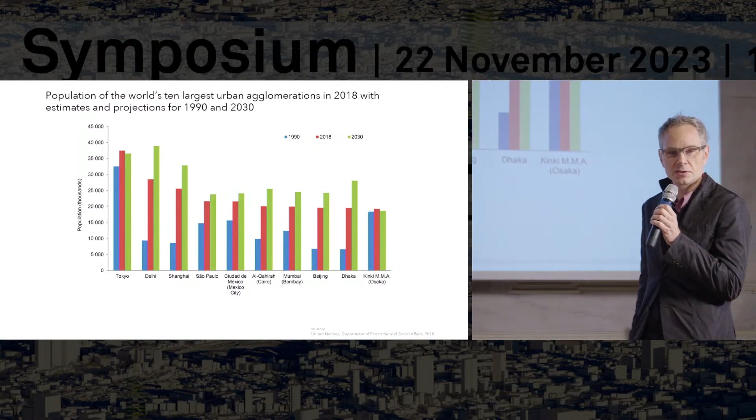As you can see, number 1 was Tokyo, and it may have been overtaken by Delhi, or will be very soon. The only two places with declining population are in Asia, in Japan actually - Tokyo and the wider Osaka region. All the others are rising sharply. In fact, around 2007, around the global financial crisis, there was an interesting point in human history: the urban population for the first time exceeded the rural population globally. And the trend is clear.

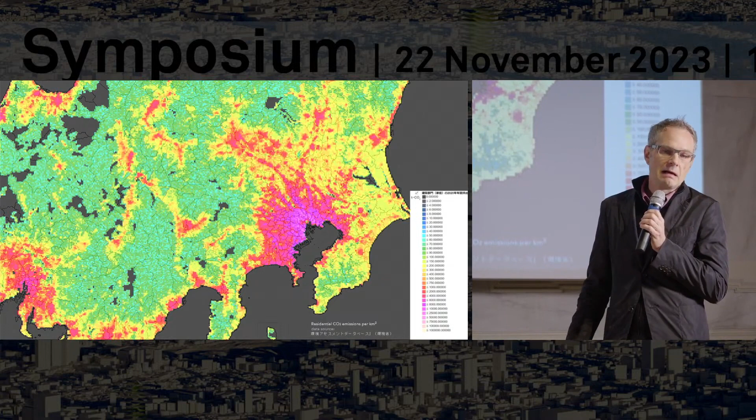By 2050, the United Nations projects about 70% will live in urban areas. So, urbanization. Urbanization is, in principle, a good thing because it is very important that we have density to limit our footprint as humanity. This shows Tokyo, the wider area of Tokyo, in terms of carbon emissions. Of course, urban areas have a tremendously larger amount of carbon emissions than rural areas. But the interesting thing is that this graph is actually wrong if you look at it in relative terms.

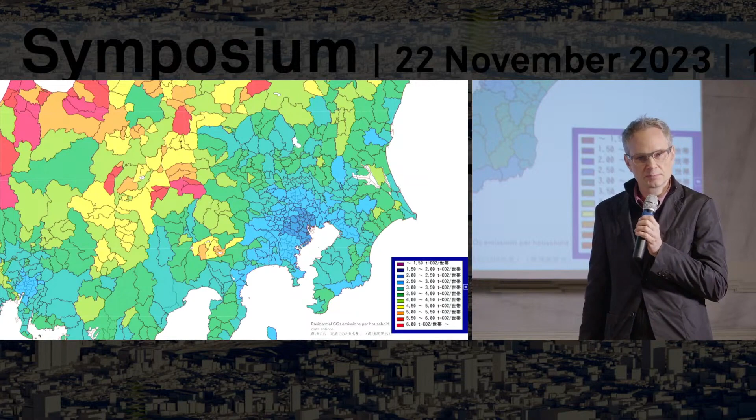This becomes even more clear if you think about this projection of global population. We are currently at around 8 billion. If you take the medium projection, around 2080 the global population will peak at around 10.5 billion people on Earth - that's 2.5 billion added from today over the next 57 years. Just to put this in perspective: to house 2.5 billion people over 57 years, we would need a city of 10 million people every 2.7 months. So that gives you an idea of the kind of issue we are facing.

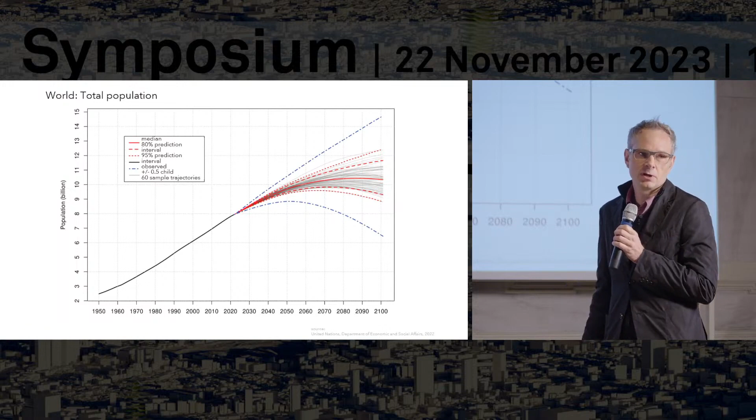If you compare that to what Isozaki said about 60 years ago, when he was 31 I think: 'Such city planning has always ended in empty theory, and that is why cities have been kept alive.' And that, unfortunately, is no longer true. Despite the city's inherent complexity, architects, planners, and developers have all had this vademecum for urban density biased towards solidified enclosures. Either the response is a commercial tower with a plinth, or it's a straightforward extrusion of a residential tower. This has been the knee-jerk reaction in order to increase density.

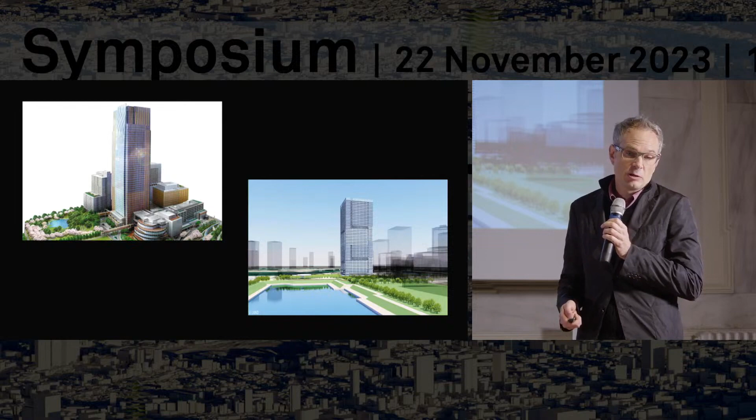And the problem is that we can see the limitations of enclosures here. It's a tragic disengagement with the city. And the more of these you build, the more you actually de-urbanize. More public space is turned into privately owned public spaces, which are of course the opposite of real public spaces. I've often talked about this, about the Starbucksification. If you go to these commercial areas - Sharon Zukin, a sociologist, called it the pacification by cappuccino. So we are all happy, part of this system where, as long as we have enough means to afford it, we enjoy these areas.

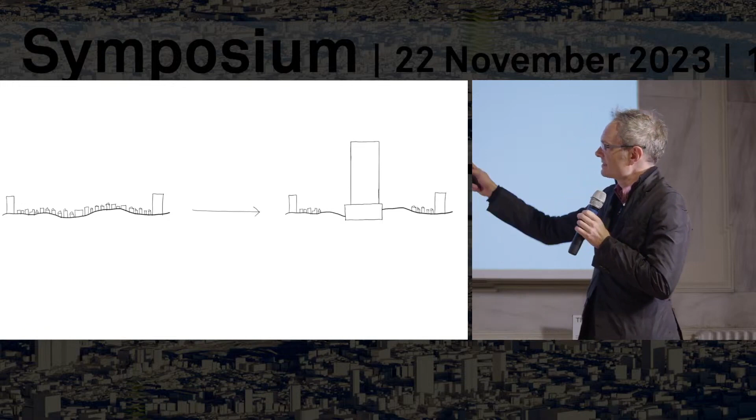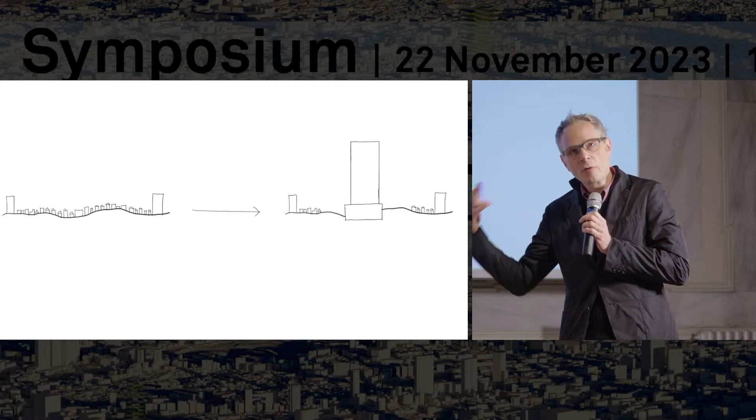So the conventional response has been the tower with or without plinth. This left image is a diagram of Tokyo. You see an ocean of small and big buildings, which is completely open, so this entire in-between is walkable. There's nothing wrong with the vertical per se, but if that's the only response we have, I think we are facing serious issues, and we'll talk about them in the coming presentations.

So the problem is the conditions at ground. The conventional high-rise buildings do not understand or care to understand the urban fabric. 20 years ago, Koolhaas, in a scathing criticism of what happened in Tokyo, said more and more of the world's ground floor is handed over to Jerde, whose universal blueprint seamlessly closes off all horizons, blocks all the exits, eliminates all perspective.

Now, criticism is nothing new. As we could see from Koolhaas, it was preceded by Arata Isozaki, who I've mentioned. Then there's, of course, in the 60s and 70s, Henri Lefebvre, Jane Jacobs, David Harvey, Sharon Zukin. They all are aware of the dangers that come with that kind of urbanism. But also not new is the recognition that repeating the conditions at ground level in the air provides density and openness at the same time - the importance of openness.

So in 1954, Le Corbusier's disciple Yoshizaka came back to Japan during the massive reconstruction after World War II, and he wrote in a very small article: 'It is not necessary to make all the fine details of the home with our current budget for public housing. What we need to do is to make land.' And he continued, 'Fortunately, the space in the sky above Tokyo is still relatively unoccupied.' So that's his sketch from the time. It's rather modest and quite cute, actually.

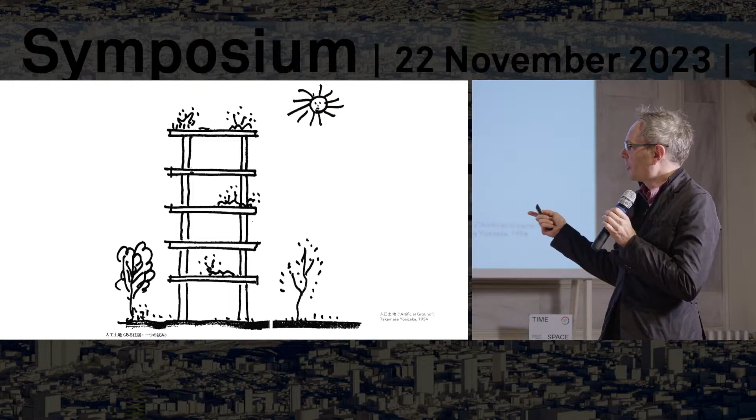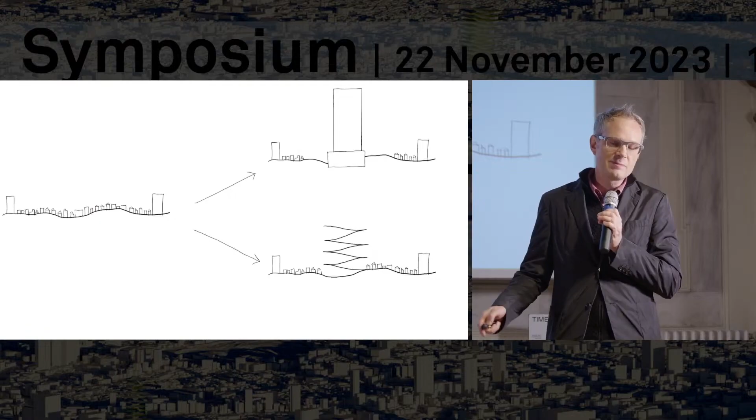Vertical landscapes introduce a new urban typology. From the only response being solidified mass, to the continuation of the city's land, streets, squares, parks, in the air. Open to anyone at any time, these man-made landscapes are the natural extension of the urban ground conditions at ground level.

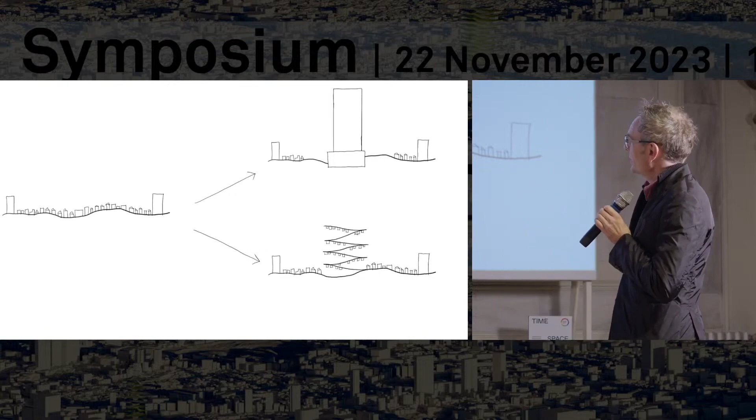So you can see we would think that we continue these small elements upward. And by the time we are in the air, we realize that we can actually start hanging from the land, suspending. Now suspension has a tremendous advantage - it's the minimal material effort that you need versus compression. And you can see that we have another way to deal with density, increasing density in the urban context.

Vertical landscapes are not a building, they are infrastructure - infrastructure multiplying the city's ground without architecture's compulsive desire to determine. You can see that in principle we have a surface, a place for people to have housing, or it could be shops, it could be what you see normally on street level in the city. And the overall structural system is something like this. This is just a prototype.

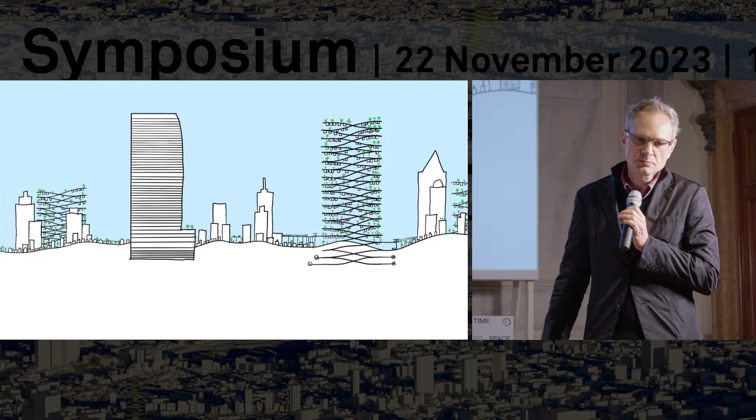Vertical landscapes are not about height per se. We don't have to go as high - we could go higher, we could go lower. It's about the principle. So instead of density as striated enclosure, we can add vertical landscapes that lead another way - density in openness. More ground means more of the bottom-up evolution which lets a city thrive.

And finally, not a master plan. Vertical landscapes are not a blanket solution trying to undo the city, as we've seen in the past and we'll be seeing in the next presentations. They are local interventions which seek opportunity and respond flexibly. They are one of several possible solutions to a problem too complex for a one-size-fits-all approach.

So this, in a nutshell - kind of a big nutshell, sorry - is what the vertical landscapes are about: density of openness. And that's possible and even logical precisely because of the heterogeneity of the city in general, and Tokyo gives a remarkable example of that, from which we derived these vertical landscapes. So let the next speakers show us why and how, and what that could mean on a global stage.

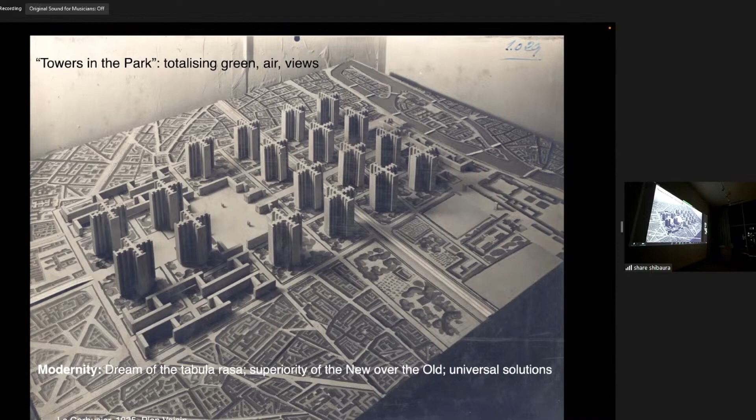In Japan as well, it took an effort to make the high-rise city a reality.

One of the proponents was Minoru Mori, the founder, or the second president, of Mori Building in Tokyo. 'The builder who pushes Tokyo into the clouds' was the headline by the New York Times, calling Minoru Mori the Tokyo Tower developer. Roppongi Hills was his poster child, opening in 2003.

Back then, he also unveiled an exhibition called The Global City, where we would see these kinds of high-rise models—Mori Building making a business model of building and replacing the old vernacular city with towers.

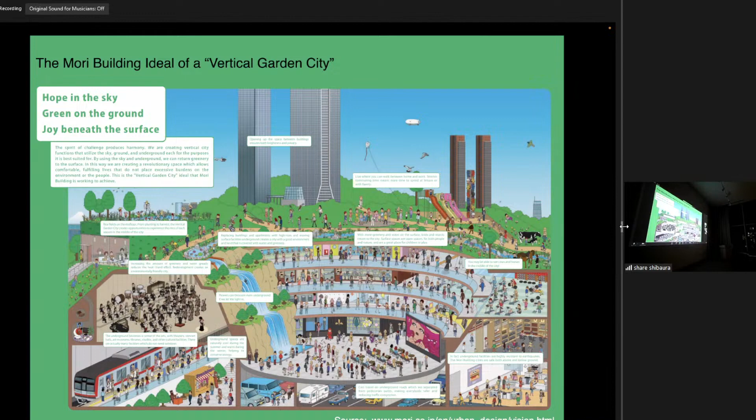This is another text part from Mori's vertical garden cities. It is about cementing Tokyo's positioning among the megacities of the Asian region and stimulating the economy. We don't hear a lot about urbanity, about authentic public life, about mixing of people of different social classes, of social integration, about community structures and so forth. All that seems to matter here is economic value.

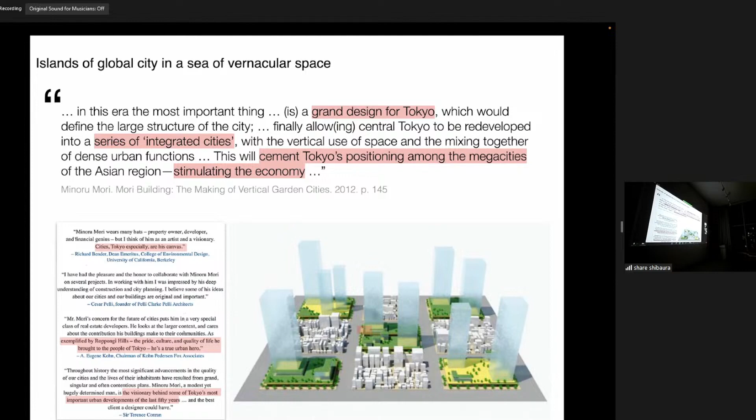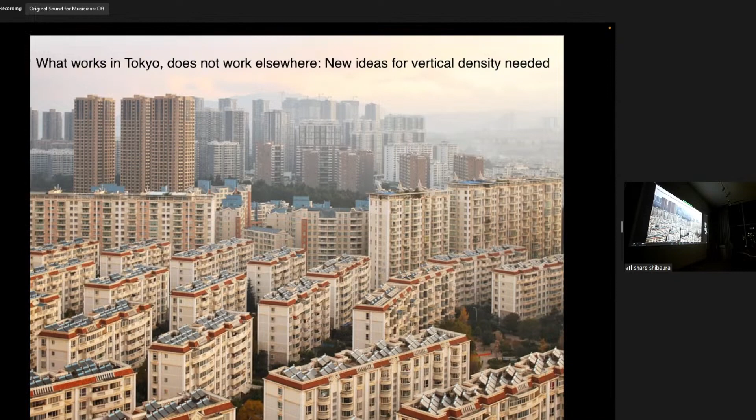If we go from Tokyo for a short excursion to China as well - yes, in Tokyo the high-rise is working comparatively well, we don't see the social problems associated with high-rise housing in other countries. If we go to China, and see now one typology copy and pasted dozens and hundreds of times, we see what kind of environment this is creating, where people hardly meet each other anymore, where we are segregated in compounds and enclaves, moving between these kind of compounds, all urban life grinding to a halt.

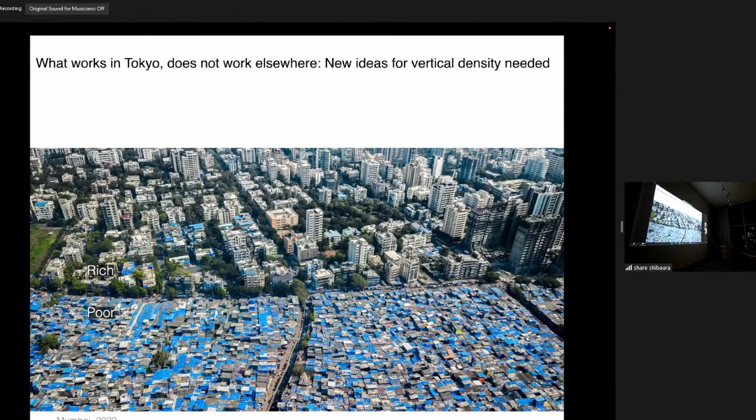If we go to other cities as well, this is Mumbai, we see this kind of very sharp segregation. Above is the city of the wealthy, the city of the rich. At the bottom, we see Dharavi, the world's largest slum, the city of the poor, sharply divided. So how can we overcome this kind of division? How can we create more vertical density by integrating communities, by creating continuity in the city, rather than creating this kind of compoundization and mallification that we're seeing playing out all around the world?

So is there a better way towards vertical density? How to create resilient, sustainable cities? This is really the question that I want to bring up for the following speakers as well. I want the audience to keep this in mind when they are listening to the designers of the vertical landscape.

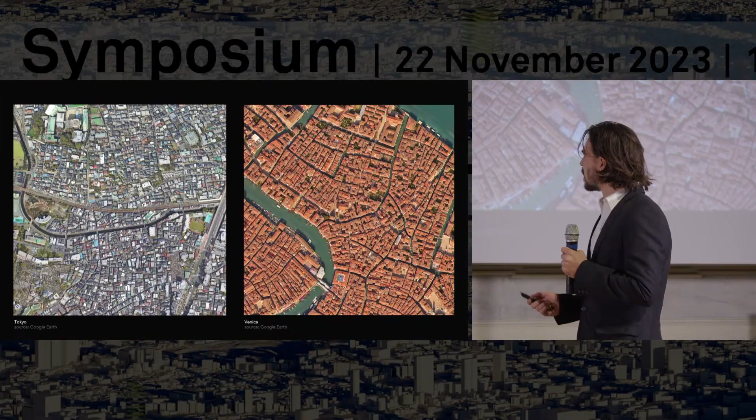One big difference, though, is that all the buildings in Tokyo are new. They're on average only 27 years old, while the buildings in Venice are maybe 500 years on average, I'm not sure. What's even more important is that the buildings in Venice may still be here 1,000 years from now, while the buildings in Tokyo will all be gone.

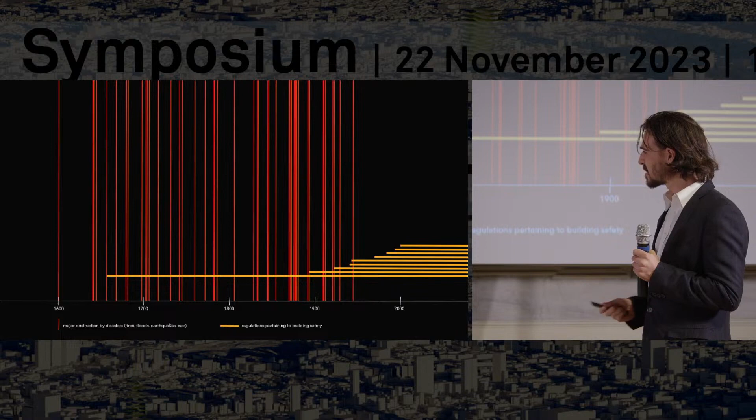This culture of urban regeneration in Tokyo didn't arise in a vacuum. This is part of being in a country where nature is stronger than man. On this graph, you can see how the city has been repeatedly destroyed during the course of history due to earthquakes, fires, floods, and also wars. So it's not just natural destruction, also man-made destruction, and sometimes both go together.

As is the case now with the new urban regulations, which on the one hand are stopping this pattern of destruction, but they also imply a form of destruction in themselves. Because if you don't constantly rebuild the city, it won't be able to live up to these regulations.

Even though that's true, the life that is happening in between has stayed almost the same. So we could say that resilience in the Japanese city is dependent on this ephemerality, and ephemerality is a form of resilience which keeps the city and its contents alive.

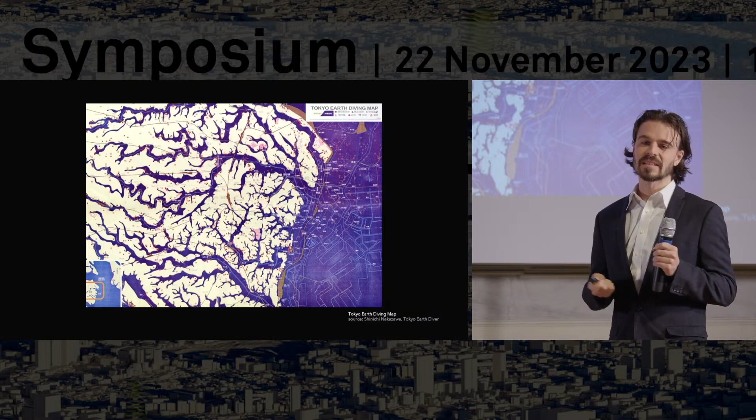Today, the water has receded to those white lines that you see here, and in fact the rivers are mostly built over with roads and highways. So you won't see that anymore, but the topography that is left behind is still felt.

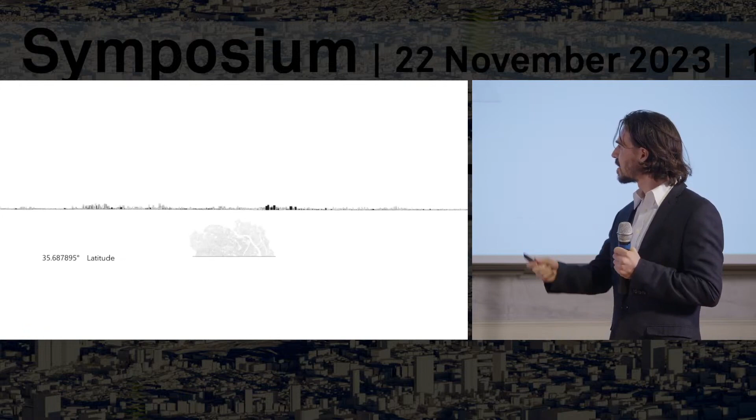And we see this clearly if we take a section through all of the buildings in Tokyo. Let me play this clip. You see how the buildings are climbing up the ridges, and if you paid attention in the beginning, you also saw that many of the buildings are actually built below sea level. Now if we take vertical sections, you'll have to look closely, but you'll see there are all these ups and downs in the terrain.

But what's of course much more striking is that there's also a huge vertical difference between the buildings themselves, so you have these tiny houses built right next to skyscrapers.

Another reason why it's such a nice city to walk and even cycle in is that this natural terrain where you walk on is overlaid with a man-made terrain, platforms carrying a dense network of trains and also metros underground. It carries around 40 million passengers a day, so you really don't need a car to get around in Tokyo, which means it's very easy for anyone, also elderly people and children, to get around, and this means you also walk more and have a healthier life.

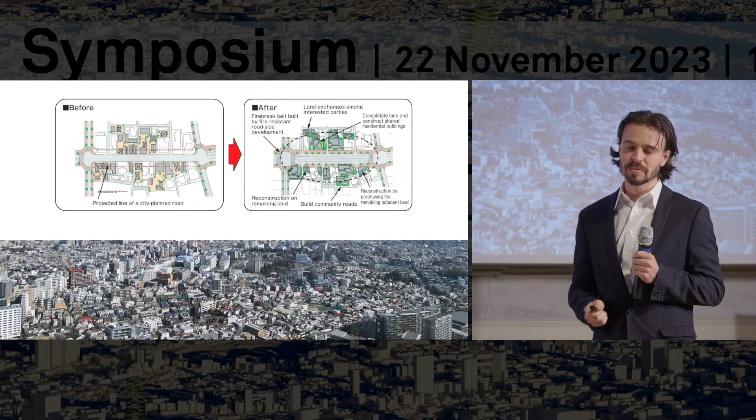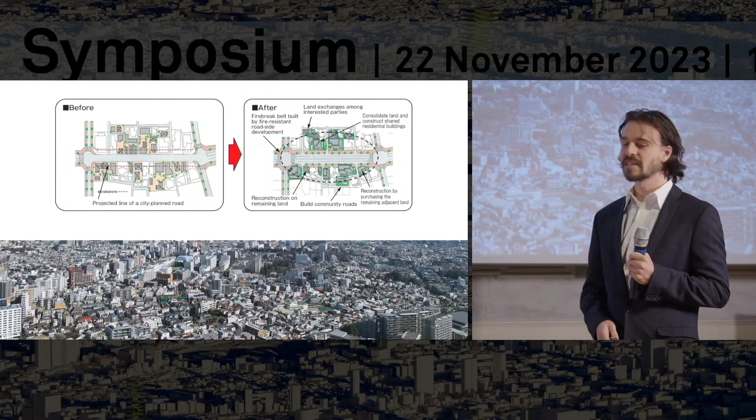That is why the government has been promoting high-rise building and road widening, especially in high-risk areas. These areas at the highest risk are maybe surprisingly not located in the oldest part of the city, but in a ring around it—the areas that were rapidly built up during industrialization and post-war reconstruction in the past century. So if we think about the vertical landscapes, these are some of the places that could be most urgently in need of opening up space.

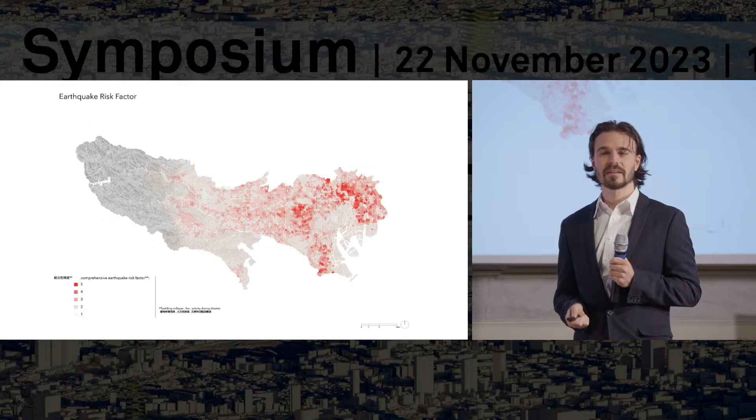But there are other areas that require our urgent attention. Throughout the history of Tokyo, earthquakes have always been a possibility on people's minds. It could happen anytime, but you didn't know when. But with climate change, we are moving closer and closer to the certainty of catastrophic flooding. And when this happens, and this could perhaps happen tomorrow already, 4 to 5 million people would have to be relocated.

Now, the reason why Tokyo is so particularly prone or at risk of flooding is that a lot of the residential areas in the lowlands in the east of Tokyo are built below the water level of the rivers. So you can see that if the levees break and the water flows over the embankments, everything will be flooded at once.

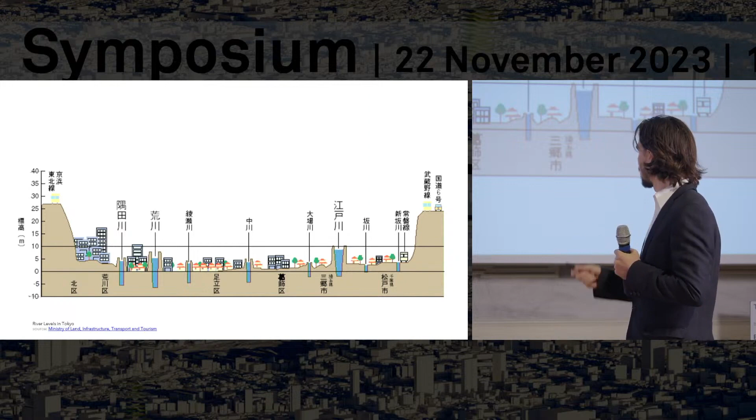The government is doing something about it. There are technocratic measures in place, like building these huge water reservoirs and tunnels underneath the city to relieve the city of this overflow of water. But of course this comes with an enormous price tag, which doesn't do anything to enhance the living environment of the inhabitants. So as architects, we naturally think it would be wiser to address the root cause of the problem, which is that nature needs to be given more space in the city.

Currently, Tokyo is lagging behind in this aspect. We've seen that there's a lot of informal greenery in the little alleys, but in terms of public green space, Tokyo has only 7.5% compared to 27% in New York and even 46% in Sydney. So we're dealing with this paradox that the more people live in one area, the more green space will be needed, but the less is available.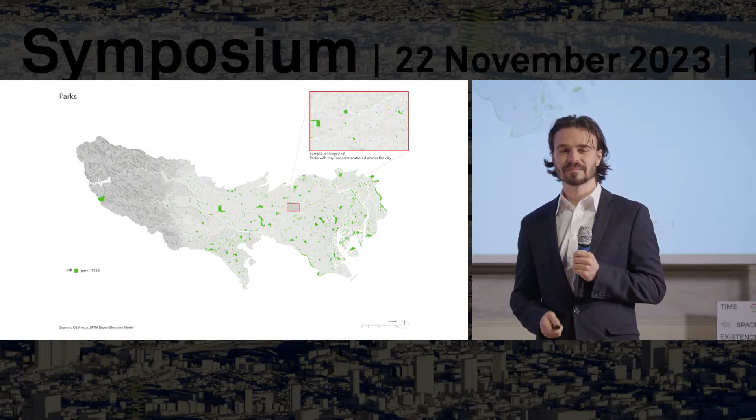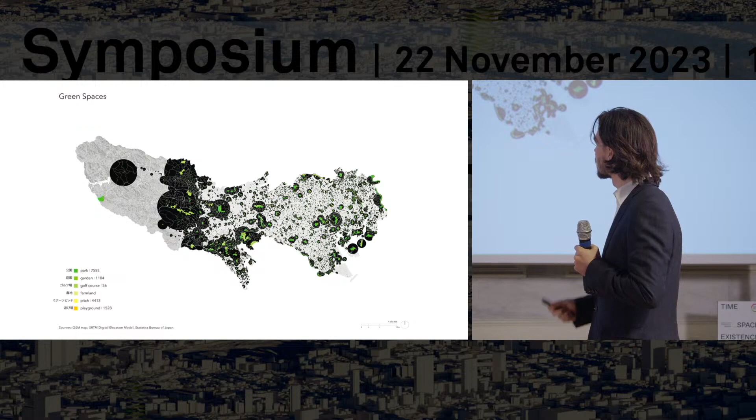So how much do we need exactly? Well, the World Health Organization has a recommendation of a minimum of 9 square meters per inhabitant. If we follow this standard, we can see that the current green spaces only cover the areas painted in black here. So everything outside the black is currently lacking in greenery.

In the past, there have been plans to remedy this. This was a very specific era just before and after the World War, where government officials were trying to plan this green belt around the city, modeled after European cities like London and Vienna, trying to contain the sprawl of the city.

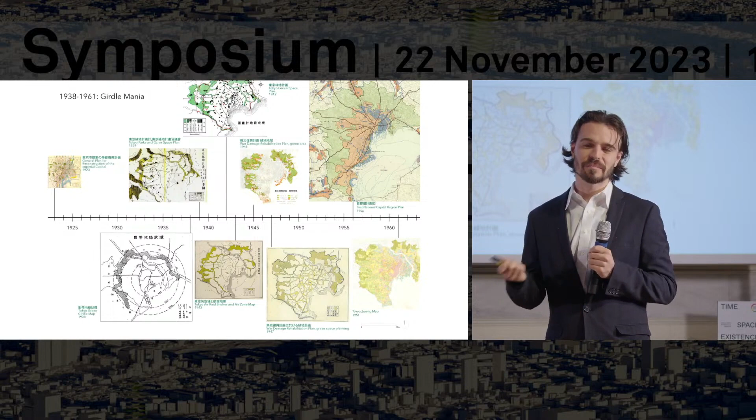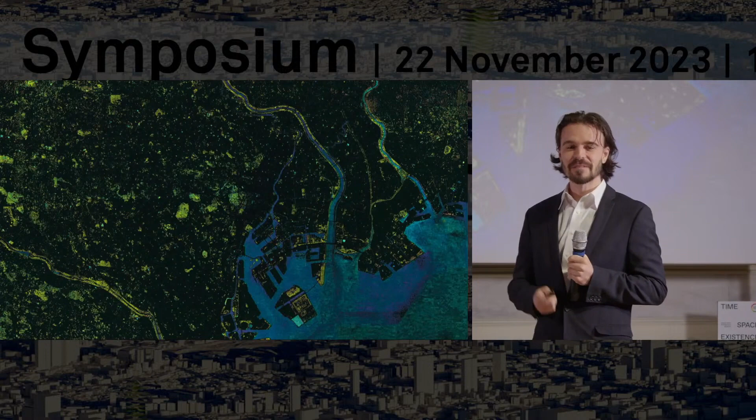That wouldn't work. But what we're saying is, what if we stack the parks on top of each other? If we forget about the buildings for a moment and just look at the structure of open spaces in Tokyo, we find a very beautiful and amazing pattern.

So what we're trying to do is not to impose our own logic or order on top of this, but try to work with the forces of the city, the natural evolution of the city, to create something that will naturally fit into this patchwork.

So this is where the vertical landscapes could fit in, based on our analysis of where they would make the most sense. In case you've missed them, you can see them here.

So basically today, what is the status quo? We have two competing types of development in Tokyo. We have the low-rise city, where we have this social cohesion, but we're lacking open spaces, green spaces. And we have the high-rise city that does promise more green, even though it doesn't always come to fruition. But it obviously has this problem of social isolation.

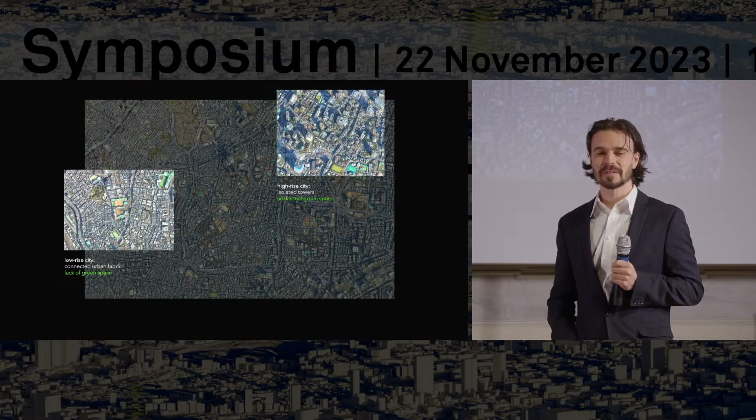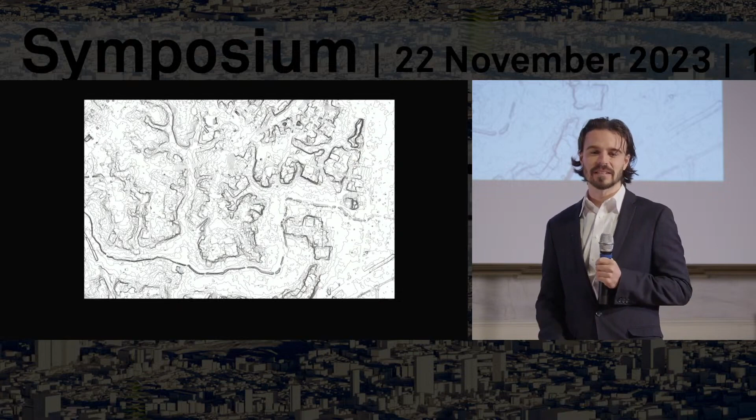So we are maybe somewhat naively asking, how can we get the best of both worlds? What we do is just look at the common denominator. All buildings in Tokyo are built on this shared topography, and this is actually what has been driving the construction of Tokyo over the centuries and has really influenced the shape of the city and how we experience it.

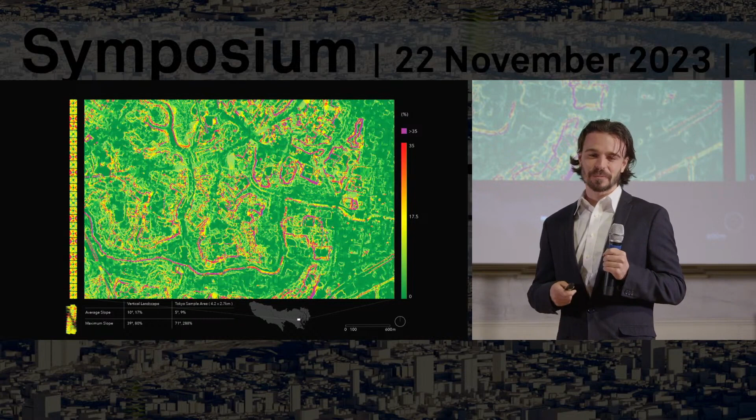So when we analyze the gradients, these are gradients that we don't just analyze with the computer, but that we are walking over every day and also cycling. In my personal case, I'm Belgian, so I cycle to the office. So we know very well how they feel, and we discovered that we could use these same gradients to start folding the topography upwards.

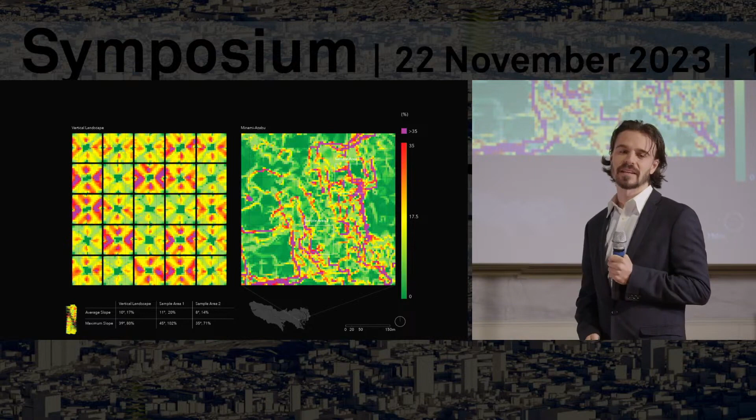So we are simply saying that we are multiplying the city itself. Here you see all the levels of a prototype vertical landscape next to a sample area of Tokyo of exactly the same size. And so together they form one continuous system. It's not just a continuous system of form, but also one of content.

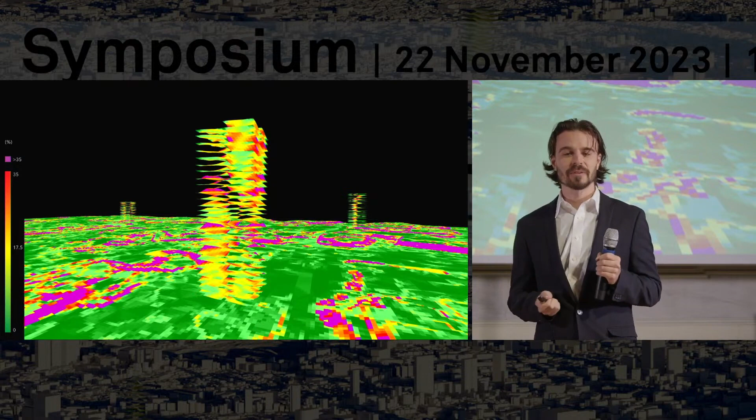And if by now you're wondering how this could all be built, well, that's perfect, because I'm going to hand over to Andrew, who will be going into the details of the structure. Thank you.

Good morning, everyone. Hope you can hear me. My name's Andrew Johnson. It's a real pleasure to be speaking with you this morning, and you've had some great background from Florian, Christian, and Joachim about the challenges that we've been facing.

So I'm going to change tack a little bit and talk about technology, and how it relates to what we're doing here. I'm going to talk a bit about what I like to call structural intuition. And my first slide here is really talking about these are structures.

These are not buildings. It really is an extension of the landscape. My challenge was how do we create a structure - as Florian said, it might be 300 meters tall, it might be 50 meters tall, it might be 100 meters wide, it might be 200 meters wide - but how do we create something that is an environment and a habitat?

It's not a building. To me, that means that as we go into something that is a series of surfaces, it's actually just an extension of the street. So immediately we looked at the environment, in this case Tokyo, but it could be anywhere in the world. And how do we make that vertical structure feel like an extension of the ground plane? Here are a few examples as we look around.

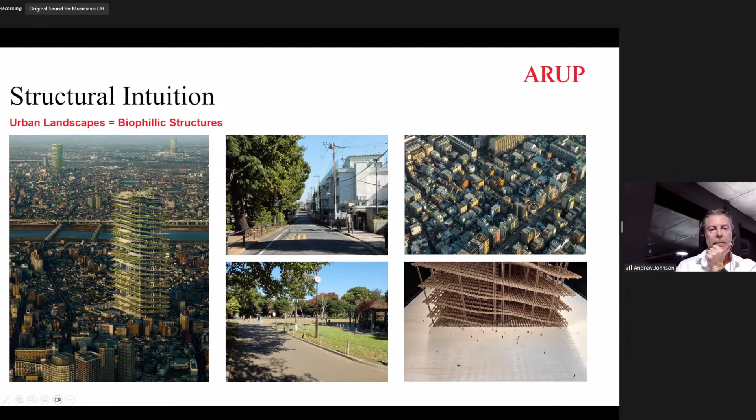I think here we take our cues from the context and the context around us as we look towards how we would develop a structure here that was organic and that really drew you in and made this a habitat, not a built form.

Florian showed a little bit about the organisation of the elements earlier, but when we looked at this from a technical point of view, of course we look at the geometry, we look at its function, its performance, and we want those two to work hand in hand - that's how we come up with something that, in my mind, creates a space that people want to inhabit and use, and it feels natural for them to go through.

So we look here, and on the right you see what I've retitled here as the habitat, but it comes from the amalgamation of a series of elements that actually form the geometry of a structure that is not a natural building, and we don't want it to feel that way. So we start on the left.

If we start to put it together, we have the surfaces, the finishes, which really is our pavements and our roadways, if you like, that we move through or pathways that we move through the building. With that, we have our skeleton, in this case of steel, concrete, and timber elements. We're sitting under that concrete diaphragm.

We have the modular elements, or the units that Florian discussed as hanging elements, and we've shown a palette or a variety of different things that they could be and could use, depending where our building is. Obviously technology can play a part in that as to how those elements are used, what their palette materiality is, how they're built, and how they're organised throughout the building.

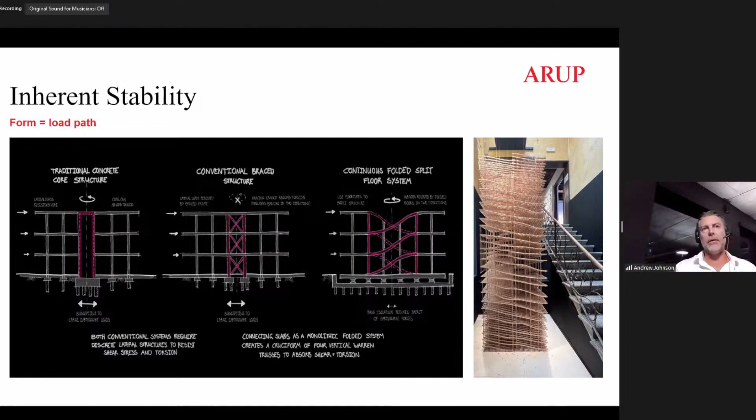So if we move a little bit further on with the stability system, you can see that the central portion of the floor plates as they fold naturally forms a cruciform brace structure in two directions. The animation on the right is really showing the overall performance of that building using the overall width, and you can see the braced form on either side of the central spine.

And utilizing full width means that we have a frame that can be utilised on a low building in Tokyo, for example, in a base isolated sense, or we can utilise in a taller building with separated bracing systems. We could integrate plastic hinge zones in the centre, or even damped bracing systems through the centre. So it's a system that can be utilised in all parts of the world, whether it be high seismic zones, high wind zones, tall or short, and it's inherent in the form of the building.

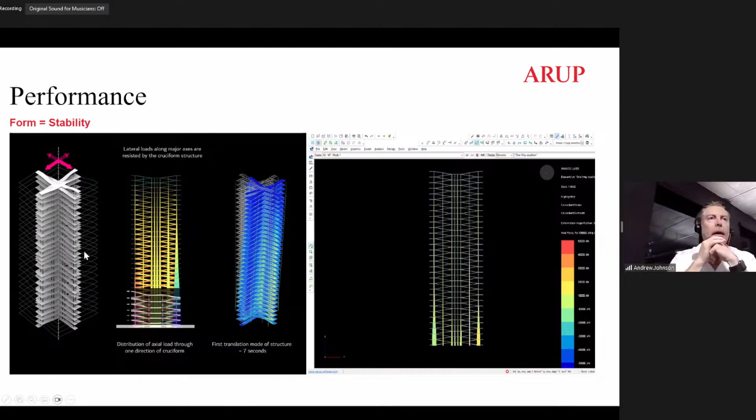So no additional structure over and above that geometry is needed, as I mentioned a minute ago. Again, the continuous form of the building naturally provides a torsional stiffness to the frame. So from top to bottom, we have a continuous surface. And with the columns strategically located around the outside to follow that surface, it allows us to create a structure that has a natural stiffness both laterally but also torsionally, working with that form to create something that's intuitive in its performance as it is habitat.

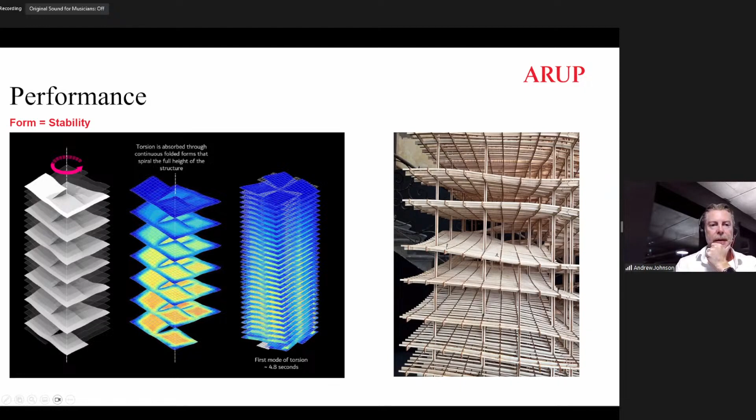And if you think about gravity structure, one of the things we worked hard on and spent a fair bit of time on was the human scale of the structure, something that can respond to different heights and different scales, but again feel like it had a natural organisation, one that wasn't necessarily defined by a system. A grid that felt like something you can enjoy and vary as you went through the building. That started with us really defining a certain geometry or size of column we felt comfortable with, and then working from the top down to add elements in or erode them from the bottom, in order to maintain an element size we felt was comfortable when we organised the rest of the spaces around it.

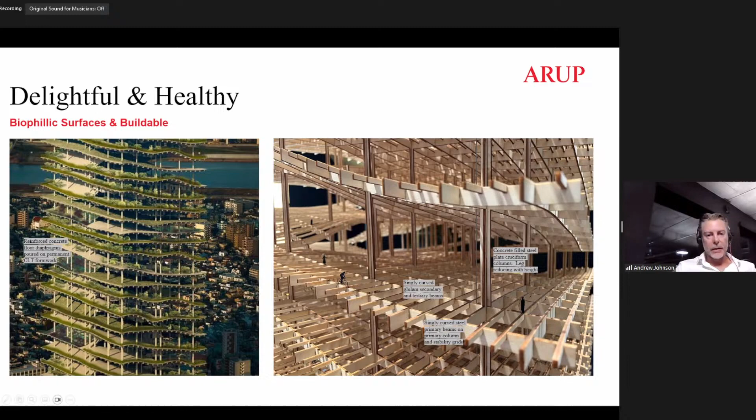To extend that, in my final slide, a little bit about materiality and the structure we developed with FBA here: on a typical surface, by volume, we came up with a solution with around 50% timber, 47% concrete—predominantly the diaphragm and surface material—and very little steel by volume. In the overall structure that changes a bit when you introduce the vertical structure or columns, but you still end up with 40% timber by volume.

We really believe these are important. There's not a structure we're doing today that doesn't need to think forward around embodied carbon and its impact on both the environment and on the building within. I think there's certainly more opportunity here to integrate natural materials.

If we look at a single surface, we find approximately 7,000 square meters of surface area just from timber beams. A timber soffit—let's say a CLT soffit—to the concrete diaphragms would significantly increase that number.

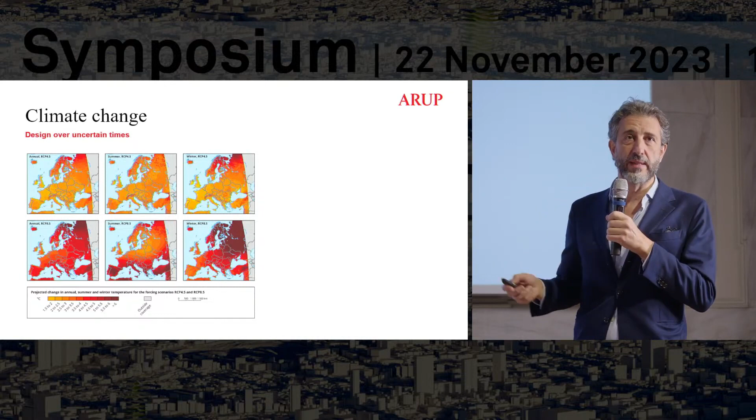And that could be applied to a series of other elements. If we move into positions or books like Gaia Vince's Nomad Century, we can ask how climate change will impact our cities, our life, the migration of people. This book is very interesting because it shows the most extreme scenarios, in which you might even see a worldwide migration of billions of people from one area of the world to another, moving north, more or less.

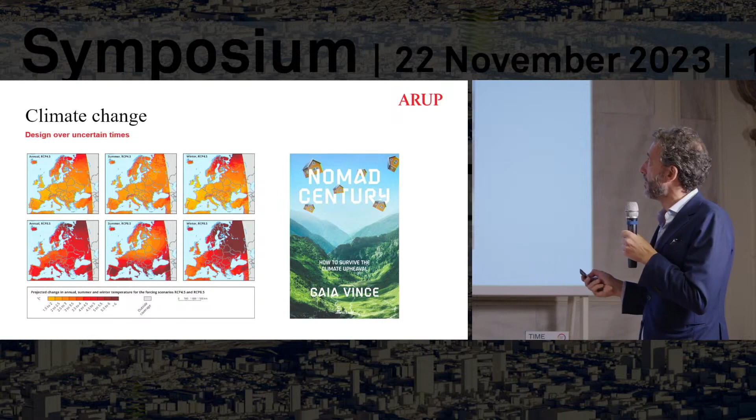So this poses a question: if that is going to happen, what about our cities? What about our current cities? What do we want to do with them? And here, the Vertical Landscape project, I think, is an interesting case to ask ourselves a series of questions and try to articulate those questions through the lens of climate change, and the resilient approach to our design, and how we can have a journey that is an adaptive journey.

So this is about the compact vertical city. It's about the fact that we are going in height, but as Florian explained before, it's not proposing high density for the city. It's about looking at where the density should happen, where we can transform what we have into a vertical landscape, in order to do what?

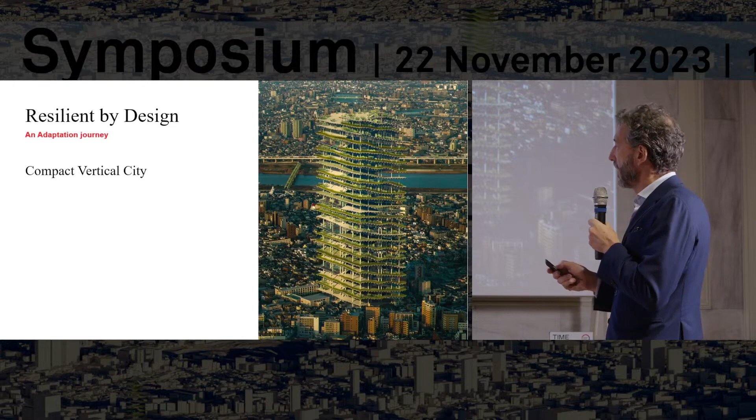To understand if that can react better to threats and hazards that are already hitting us, like heat waves and increase of temperature, as I said. How about flooding? How does this concept react, can this project give better solutions to flooding? Is it about enhancing biodiversity for our cities? Is it, through the openness, bringing something positive? I'm not saying that everything is necessarily positive. It's just bringing us into a space in which we analyze how this concept can react to all these different components.

What about water stress? What about the ability of this solution to give an answer, not just for itself, but also for the surrounding areas? This is also about energy security, about how this can deal with renewable solutions for itself and for the neighborhood around it. What are the possibilities to reduce carbon emissions per number of population, number of citizens, square meters of area? So all these different elements can be addressed, can be analyzed, and for sure this project has a lot of answers to them.

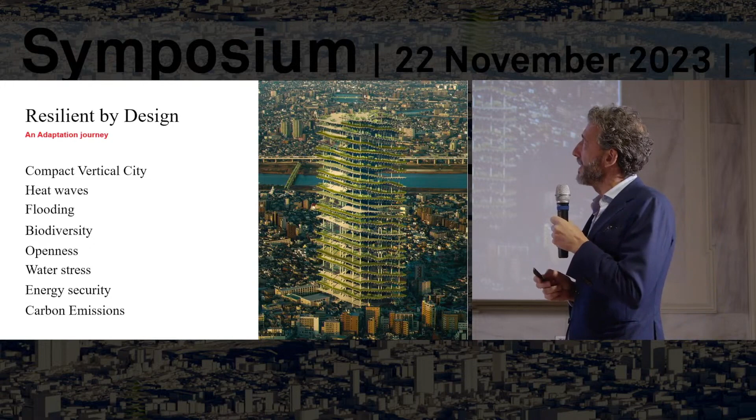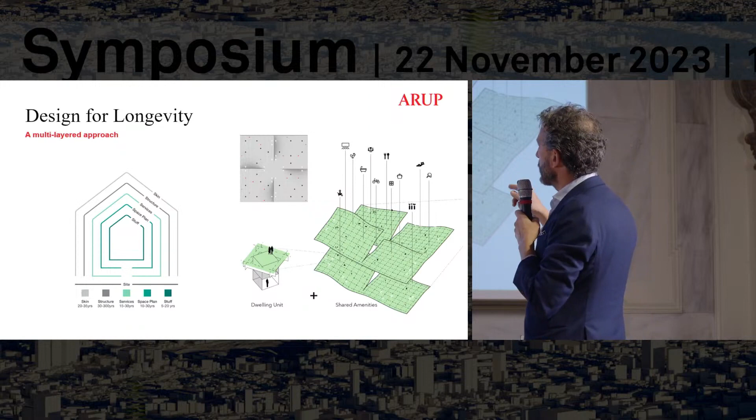And also on top of it, you've got the green infrastructure and the food infrastructure. So you are identifying a series of layers that have different purposes, different lifespans, and even different business models, in terms of how you're going to manage these different layers. There will be different stakeholders and actors in the process.

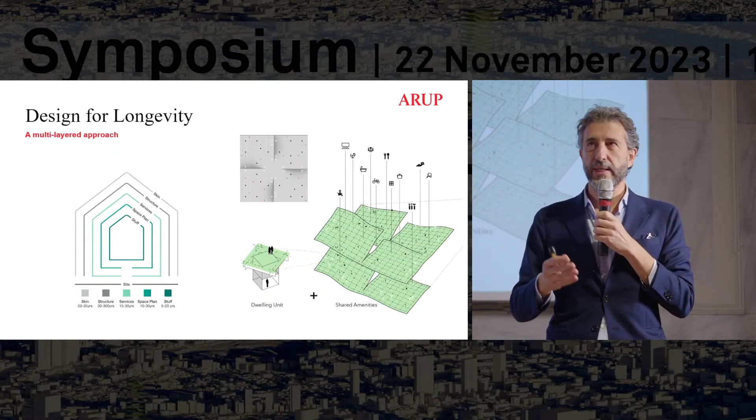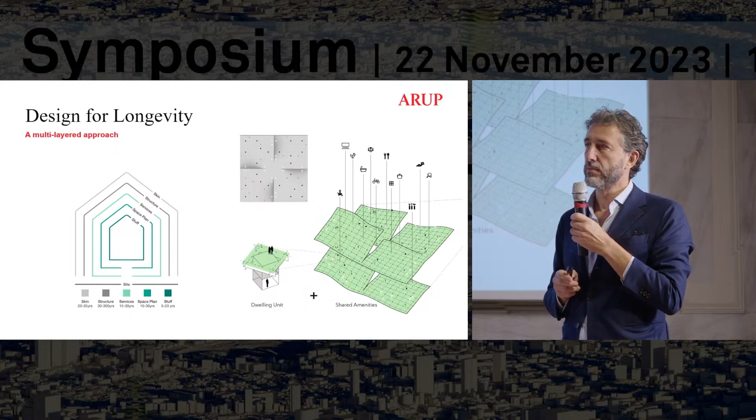So by breaking down the overall concept into all these different components, I think Vertical Landscapes introduces a new approach. As Andrew said before, this is not a building, this is a landscape that is creating a new concept for the city. I think some of the challenges we are facing might find answers in this project. Thank you very much.

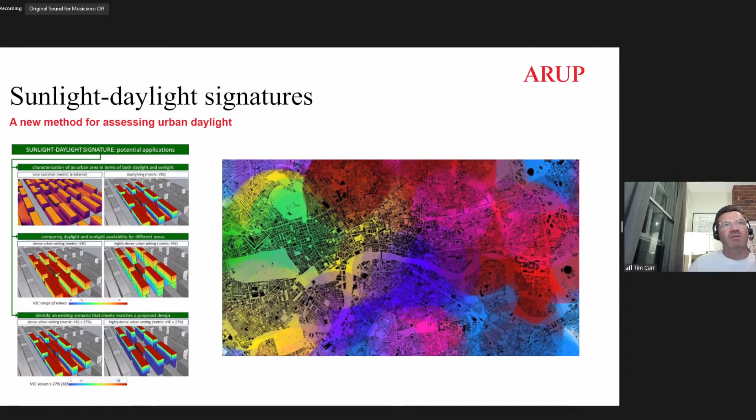The idea is that when new cities are developed or conceived, we can think about not just the amount of daylight, but the quality of daylight, how much sky view, how much reflected light we might get within a city scale. The images on the left are at a development scale; the image on the right is looking at London, where this methodology through machine learning starts to categorize areas and attribute different colors that talk about the different light characters or signatures within a city. There's a nice link here with the vertical landscapes about how we can quantify and consider how much light we'll experience in the city.

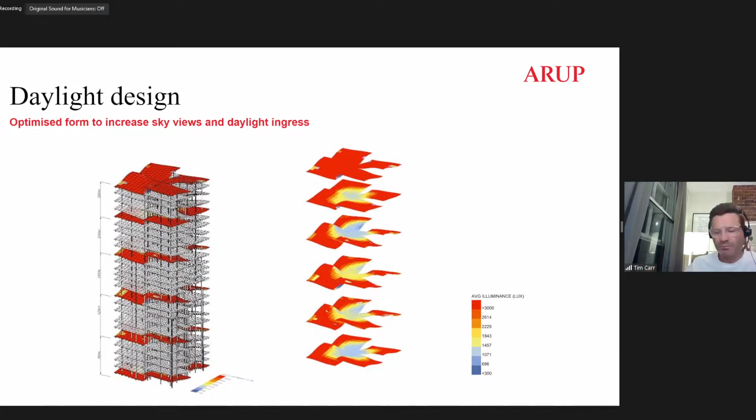If we think about the circadian rhythm, we've talked in recent years more about daylight in our projects and getting good quality daylit effects, and we've talked less about the night. Of course, the circadian rhythm is based upon light and shade and how the body reacts to both a daylit effect and then nighttime, which allows the body to rest. So the nighttime environment is equally important within a city to let our bodies rest, and also the broader environment, the non-human environment, to rest as well.

Which then leads us from the individual to our communities. What we've found in lighting cities for 100 years or so is that cities are more inviting to some people than others. Our recent research here in Australia with Monash University in Melbourne looked at how subjectively safe women and girls felt within cities, and how lighting conditions were influential on that. It was startling evidence showing that we were excluding large parts of our community at nighttime, where women and girls did not feel included or welcome in parts of the city.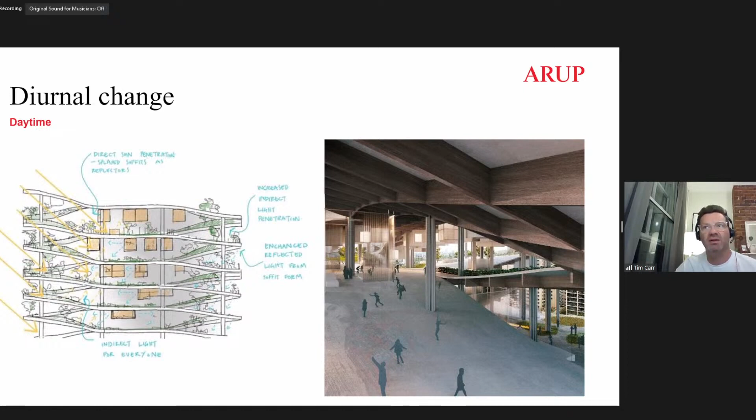The image on the right hand side is then starting to look at the other effects of the form, where we get good views of the sky and connection to the sky, which will then improve the overall general quality of the space, but also allow us to be closer to our circadian rhythms and the natural cycles through letting that light in.

And then the final slide is how that translates to the nighttime. So at nighttime, think of the effects reversed. Light will emanate from within the structure, and there'll be an interesting mix of private and public light, which reflects more towards the alleyways we discussed earlier, where you get variety and again a texture to the overall experience. By doing this, the overall environment will change as a streetscape, or a small kind of alleyway streetscape will change as the public and private light interacts.

Circulation lighting around the spaces can then be human scale, whereby we're not lighting from above all the time. We're not casting kind of less attractive or inviting shadows around the environment, or done in such a way that we can understand the topography of a site rather than lit pathways through, which can lead to kind of less inviting spaces.

So, yeah, the overall effect we hope is something that is inviting by nighttime, and then a healthy visual structure by day.

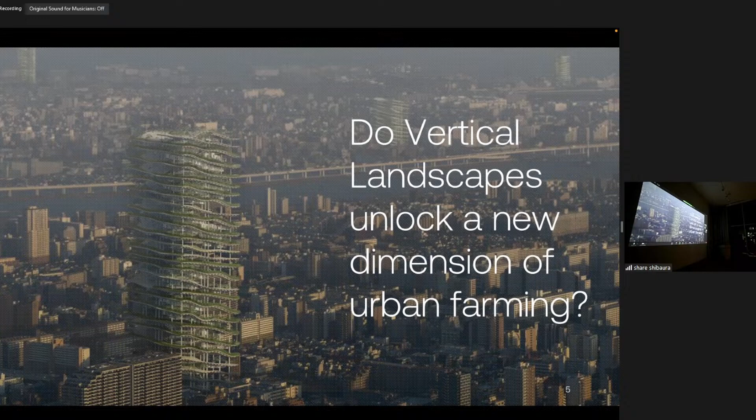So we want to consider whether or not there's an alternative, something that helps us bridge this gap. As you've heard today, vertical landscapes potentially offer a new paradigm for urban living. Can they offer a new paradigm for urban farming as well? Perhaps a better one. Do vertical landscapes therefore unlock a new dimension for urban farming?

Together with FBA, Braid and I were trying to imagine what urban farming would look like in these vertical landscapes. Specifically, we wanted to leverage the unique terrain and microclimate gradients you would see throughout the vertical landscapes, again bringing people closer to their food system, but still having the level of automation required to feed communities at scale.

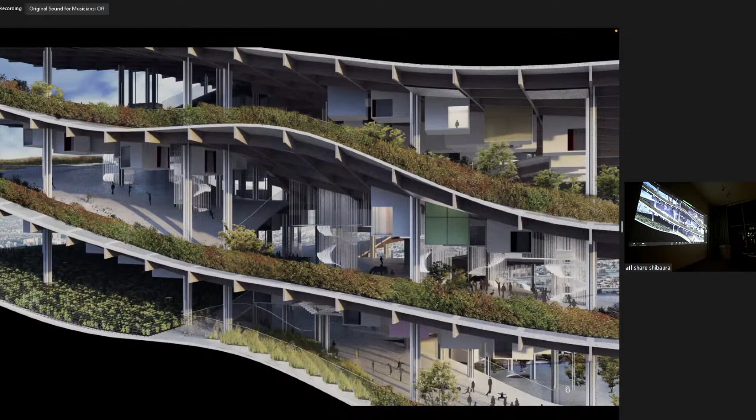So our solution to this is voxel farming. In computer graphics, voxels are three-dimensional pixels. In vertical landscapes, voxels are 3D spaces slightly less than a cubic meter in size, where each cube or voxel represents a single area where a single crop would be grown. Each of these voxels is arranged amongst other voxels, both horizontally and vertically, allowing for very strategic intermingling of different plant species. These voxel fields are dynamic, three-dimensional agricultural fields that, with our technology, we can optimize for resource creation, resource consumption, nutrition, and even well-being of the residents of the vertical landscapes.

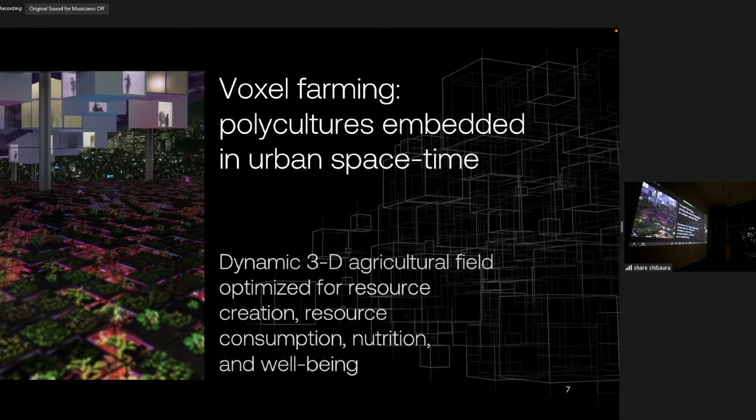Of course, when we're trying to optimize a field, there are many factors to consider. Today I want to focus on one dimension primarily, and that's crop complementarity. As the name suggests, it describes how two plant species could exist in proximity to one another. This relationship can be positive, neutral, or negative, depending on the plant species' morphology, their diseases and pests, and potentially even the chemicals they release to communicate with one another.

For example, strawberries and tomatoes might make pretty good neighbors because their difference in canopy height actually allows more natural sunlight to permeate into the voxel fields. On the other hand, bell peppers or paprika here in Japan and tomatoes might not be very good neighbors because they have many of the same pests and diseases, so if we can, we should try to keep them separated in space and time.

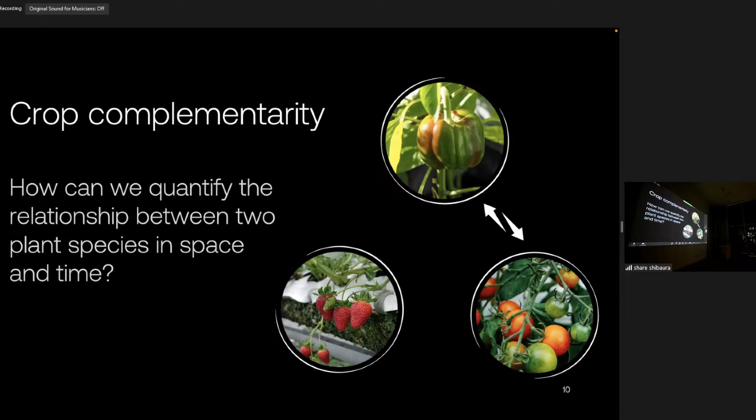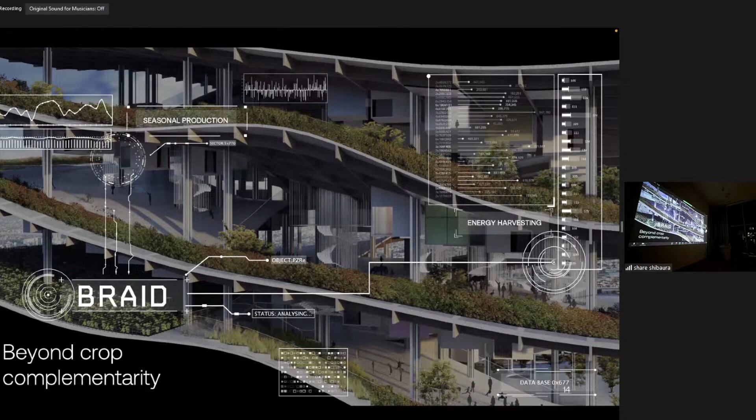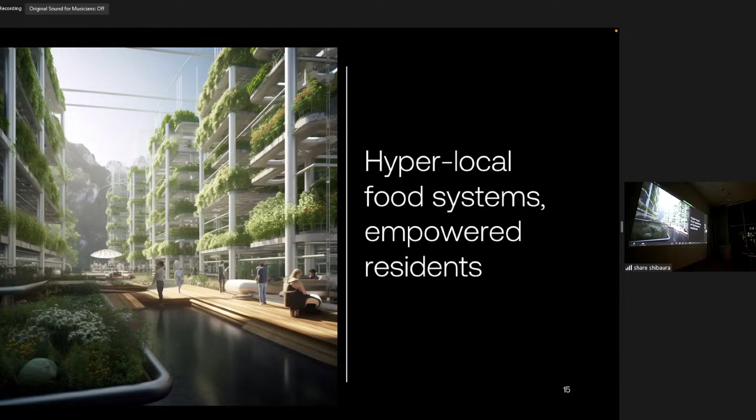Currently in Tokyo, fewer than 10,000 people are engaged in any kind of agriculture for more than 60 days a year. That probably isn't surprising, because urban farming is not feasible for most of us—it's very difficult to imagine taking time out of our lives to produce food in any meaningful volume. I argue that these voxel fields within a vertical landscape will empower residents to play a more active role in their food system, because these fields have a much greater proportional impact, not just on the food produced and the nutrition it provides, but also on your surrounding agro-ecosystem. You're incentivized to care and to play a greater role in your food system.

So vertical landscapes, if they are to be built in Tokyo, I think will be a crucial part of the urban agricultural revolution. And I hope you can see that automation is really key for managing this complexity, but also bringing us closer to our food system. Thank you.

Good morning, everyone. My name is Dario Trabucco. I haven't worked on the project Vertical Landscapes, so I'm not going to use any of the slides that you used already. I'm actually not going to use any slide at all, because I have the privilege of coming last in the sequence of speakers today. So I wanted to take advantage of this position to try to connect some of the dots and put together some ideas from what the previous speakers have been referring to.

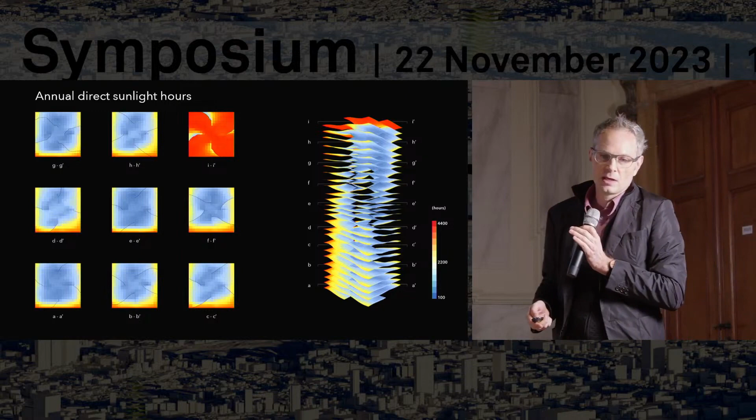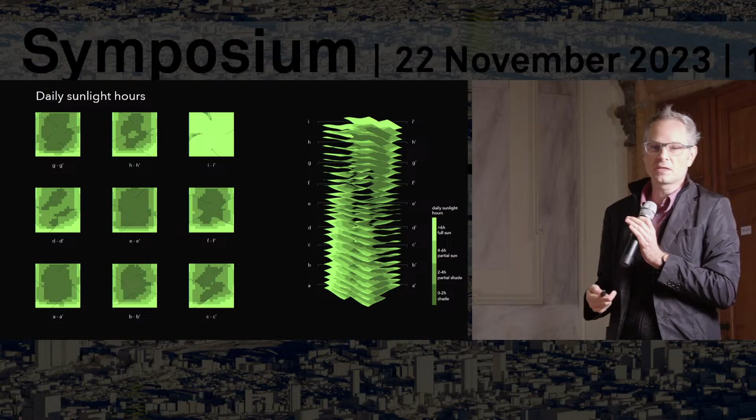So it's all about performance, right? This is, for example, daily sunlight hours, which if used for planting, you could see some plants need more shade, less shade, etc.—which would probably be part of the optimizing system that Elizabeth was introducing.

Of course, if you think about this continuous surface, you can see that we can have very simple, well-working water cycles. You just need to use gravity in a clever way, and then we could have wetlands throughout, using gravity to make this a holistic system. We saw this, that we have microclimates depending on how high you are. It drastically changes.

So all in all, as I said before, we're not talking about a building, we are talking about built environment, and it is sort of a hybrid organism. It's not top-down imposed, it's not a master plan. It's actually a ground for bottom-up evolution. And with this comes the potential of having an artificial ground for diversity where we humans are just one part. So we are beyond the idea that humans are in the center of the universe. And with this, we will be able to create a tremendous amount of resilience, and I think this is very crucial in understanding how to go forward.

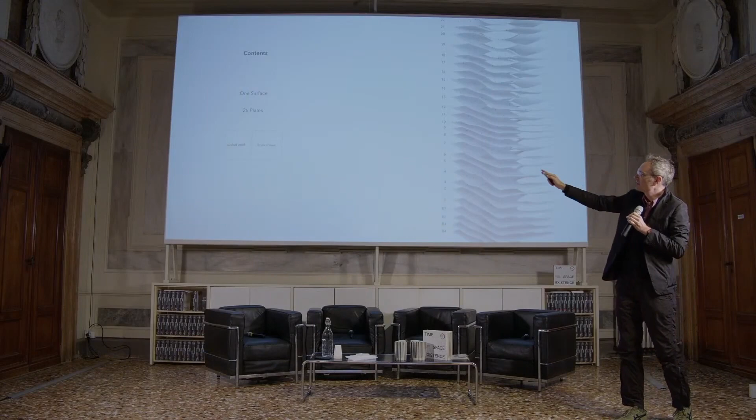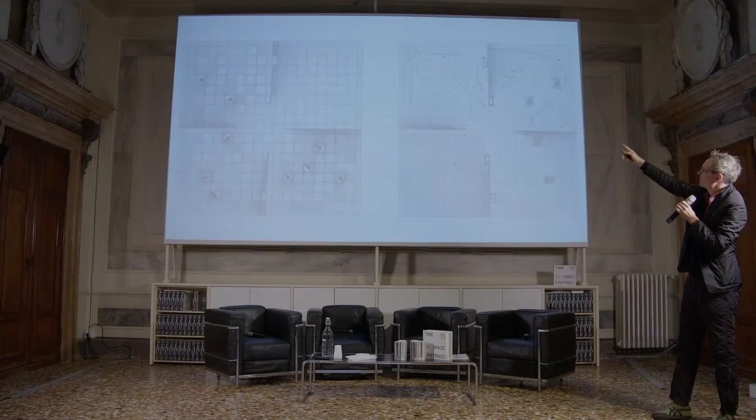Just to give you an idea, we have one surface. In this case it was 26 plates, and from below and from above is how the book is laid out. On the left you'd look up, and on the right you see a more conventional floor plan, and you see all sorts of things. This snake here is the idea that there might be a slide where you hop on and slide down. There might be, on the top right, some kind of event space like we are doing now. And on the top left, this might actually be something that Elizabeth was saying, like vertical farming. But the important thing is that it's always continuous.

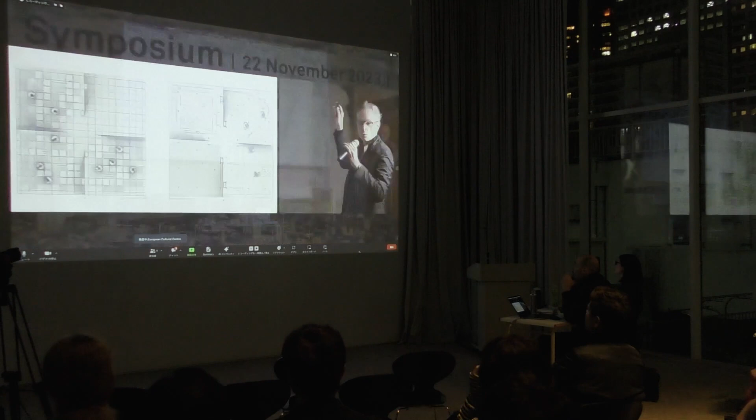As you can see in the center here, people are able to walk or use an e-bike, an e-scooter, or a normal bike, whatever—it's all accessible and continuous. So this is the basic idea of how we could envisage the city really growing into the vertical.